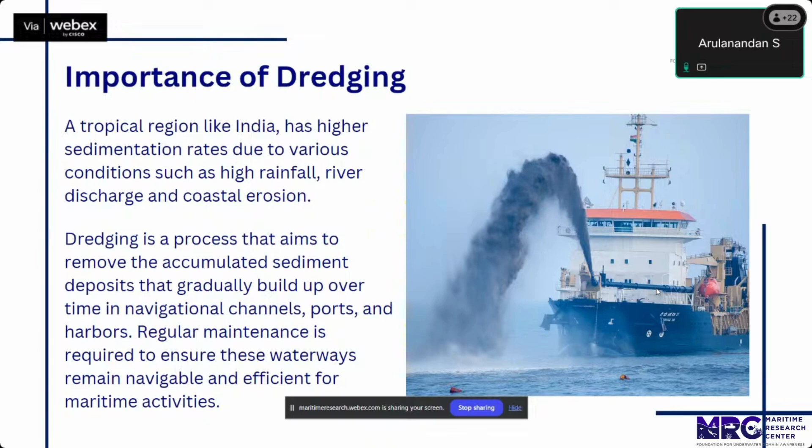First, let's understand the importance of dredging. In tropical regions, there is a common issue of excessive sedimentation, which reduces the channel depths of water channels, which are important for the economy and navigation. And dredging helps in these situations by removing the excess sediments from these water channels and thereby ensuring proper navigation.

And considering the tropical region, there are different climatic conditions and rich biodiversity, which makes the dredging more challenging, and the complete process of dredging needs more proper planning. My field of research lies in understanding the entire process and giving a guide to conducting dredging in Indian waters.

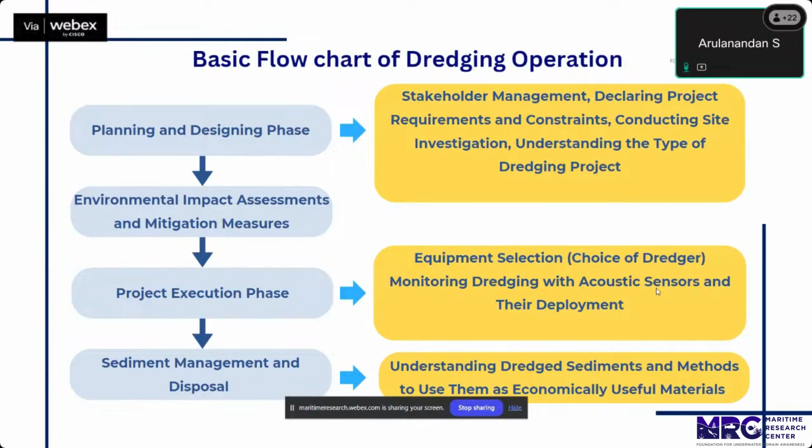This is the basic flowchart of the steps in the process of dredging. And the first part of dredging is the planning and designing phase. In the first part of planning phase, we have the decision of determining the type of dredging project. In India, there are two major dredging projects, which is classified into capital dredging and maintenance dredging.

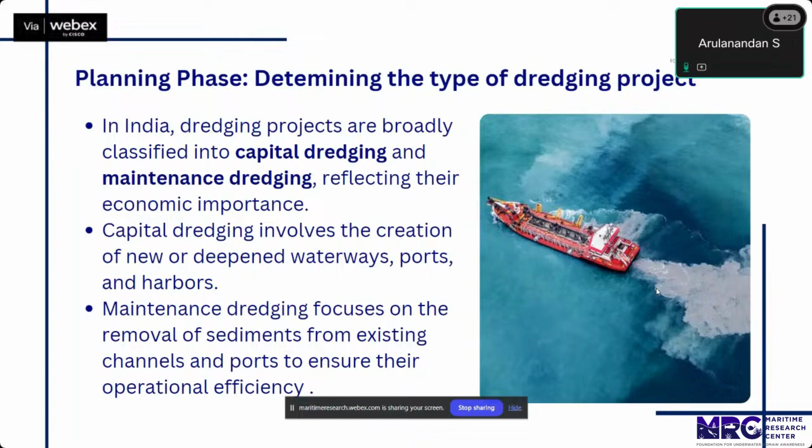The capital dredging involves conducting dredging in a completely new area, which requires complex planning and machineries. And maintenance dredging is removal of sediments from existing channels and ports and harbors for smooth navigation. This is the general workflow of planning phase in our Indian guidelines.

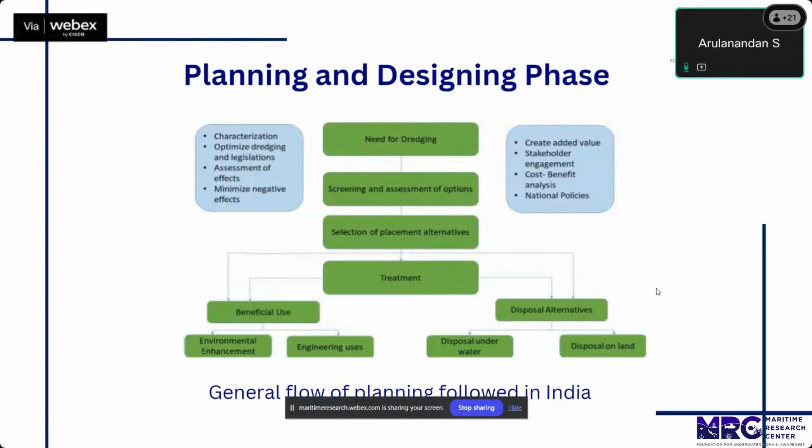When I went through these guidelines and planning phase, I found a small issue with how things are being planned in India. That is the weightage given to stakeholder management. This aspect is very important, as the entire project of dredging is determined by the relationship between the stakeholders, and this issue can be resolved by application of UDA framework in the process of dredging.

The application of UDA framework in the process of dredging will make the communication among the stakeholders more efficient and helps in policy and capability building. It gives a structured approach towards facing many problems that occur during the planning phase of a dredging project.

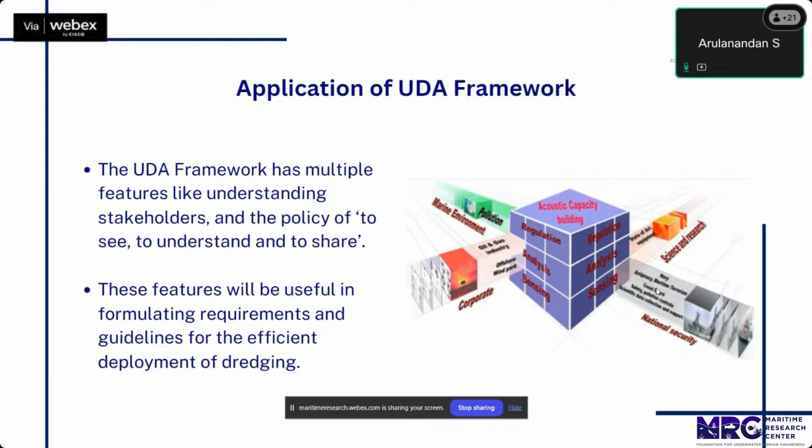The equipment selection is an important step in the execution of dredging projects. Generally in India, the cutter suction dredgers are used to dredge hard packed materials, especially during the capital dredging. And suction hopper dredgers are used for soft sediments, mainly during maintenance dredging.

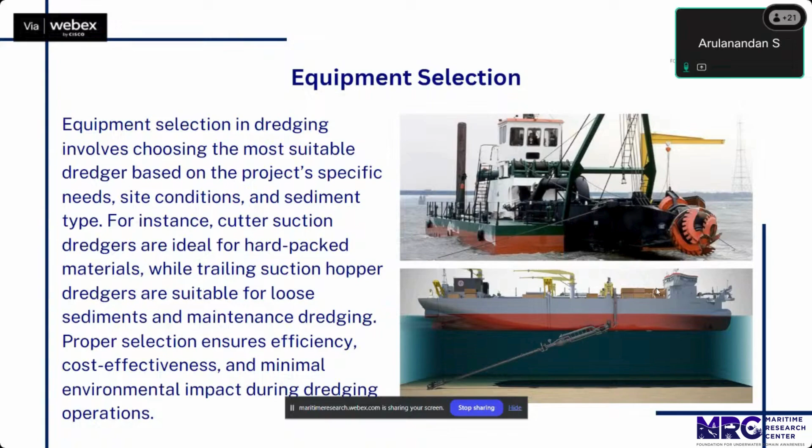The monitoring of dredging is an important aspect during a project execution phase, and the implementation of the marine spatial planning will be helpful in understanding and processing the data gathered from the bathymetric surveys and acoustic sensors.

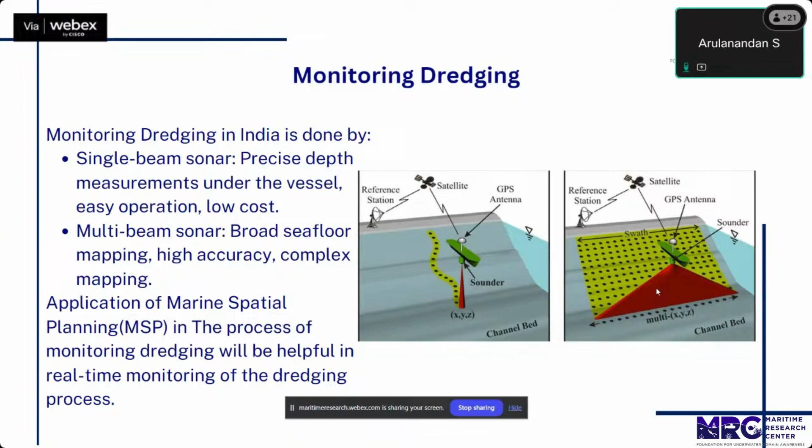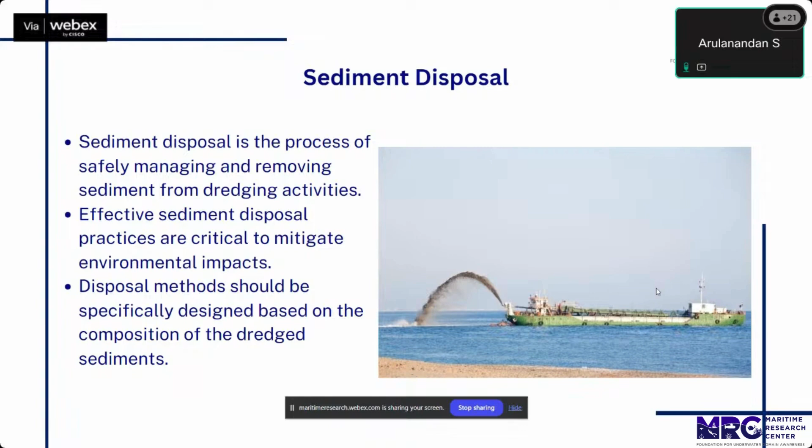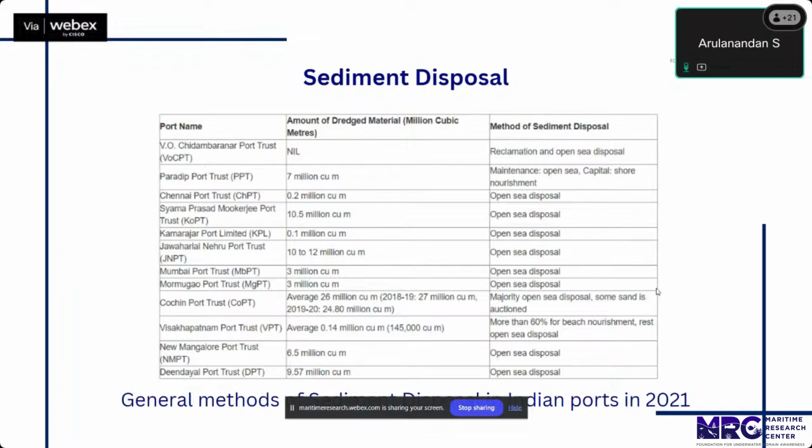This isn't a perfect method of sediment disposal, as directly introducing the entire sediment into the local aquatic system will increase the turbidity and will affect the lives of local aquatic systems. Let's take a case study that I have done on a Piaçaguera channel in Brazil.

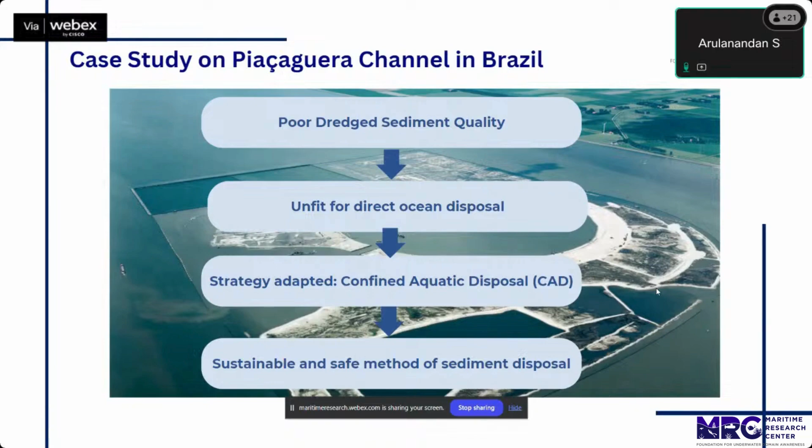And when they were doing a dredging project on the Piaçaguera channel, they discovered that introducing the dredged sediment into direct oceanic disposal will cause a major degradation in the local aquatic system. So they have adopted a strategy of confined aquatic disposal, which is a safer alternative. And these methods can be implemented in India with proper planning and calibrations.

There are also other methods and strategies that I have included in my first research note, a few of which are confined disposal facility, which is similar to the confined aquatic disposal, but confined disposal facility is done on the land, and PFTM, pneumatic flow tube mixing, which transforms the dredged sediment into economically useful materials for constructions and land reclamation projects.

And for the future scope of dredging, we can apply the underwater domain awareness framework and the marine spatial planning into the process of dredging, which will increase the efficiency and planning of the dredging projects.